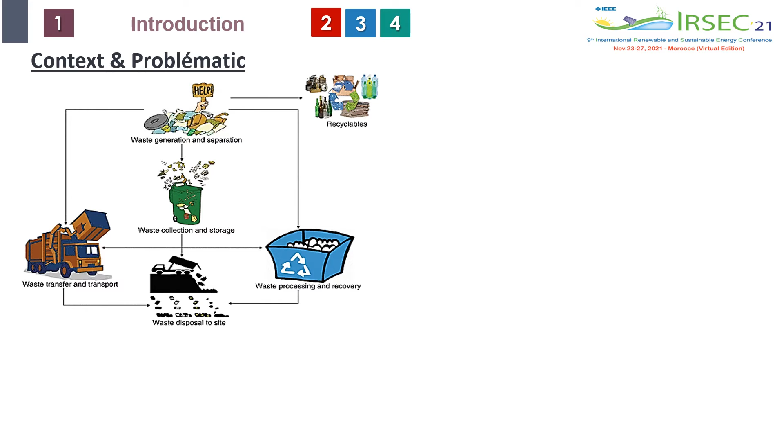As we know, municipal solid waste management is one of the major challenges facing the world. In Morocco and in Tunisia, the almost unique approach adopted for the disposal of municipal solid waste is as follows: collection and storage of waste, transfer and transportation to sorting and recycling centers, and then its disposal in landfill.

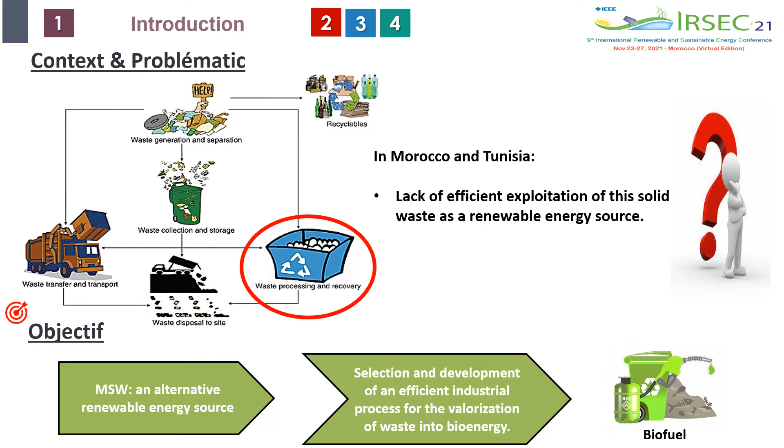Due to the lack of an efficient exploitation of the solid waste as a renewable energy resource, we are currently working on a research and development project within the framework of the Moroccan-Tunisian cooperation, where we seek to develop an efficient industrial process of valorization of MSW to produce bioenergy with an optimization of the energy consumption and the obtaining of a high output and without environmental impact.

In Morocco, according to 2019 statistics, the total production of household waste is 6.8 million tons, and it will increase significantly to 9.4 million tons by 2030. In Tunisia, the amount of MSW generated is 2.6 million tons per year. The estimated growth rate is 2.5% per year.

The composition of the waste is almost similar in both countries. It is characterized with a high moisture content, and it is constituted by a high quantity of biodegradable waste and a significant percentage of 20% of combustible solid waste with important calorific value like plastic, paper, cardboard that can be recycled and energetically recovered.

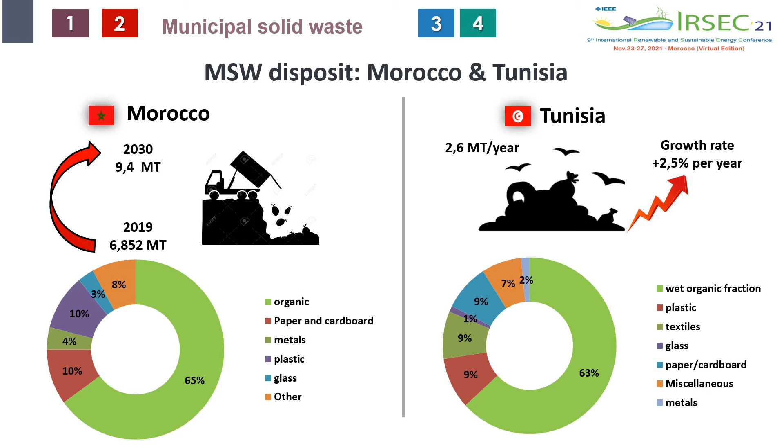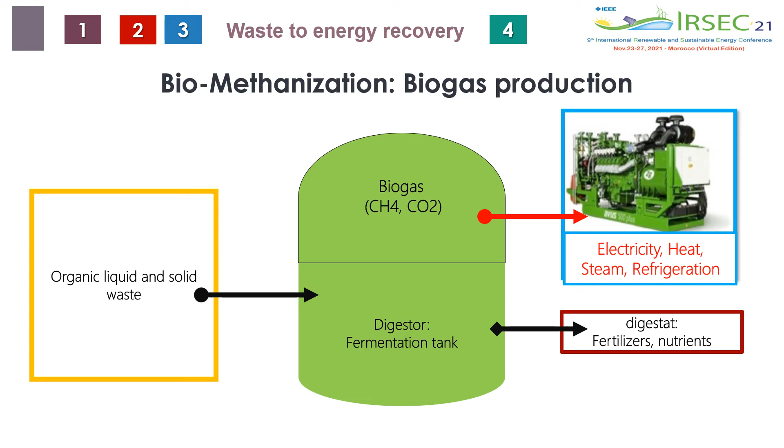In their strategy targeting energy recovery and waste reduction, Morocco and Tunisia have generally resorted to biochemical means such as bio-methanization due to the domination of fermentable waste. For example, in Tunisia, they have implemented a collection and treatment of biogas programs at the controlled landfills and some methanization units at certain agricultural complexes.

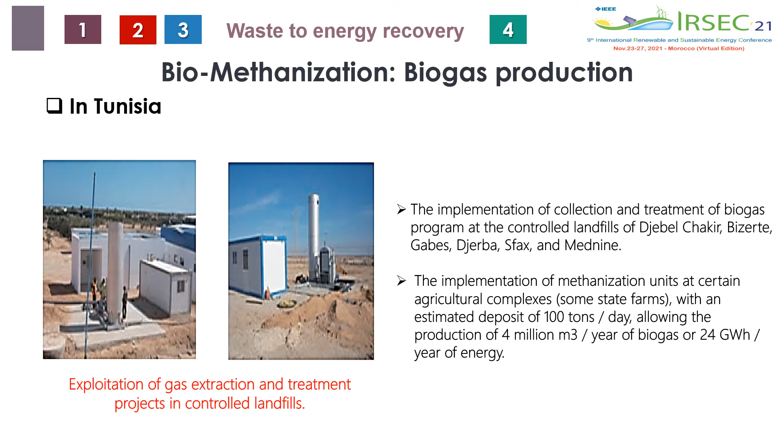In Morocco, several cities are involved in different energy projects for the biological recovery of MSW. For example, in Rabat, we have a large sorting center called Oum Azza, which recovers organic waste by producing biogas through a system of treatment and conditioning of biogas.

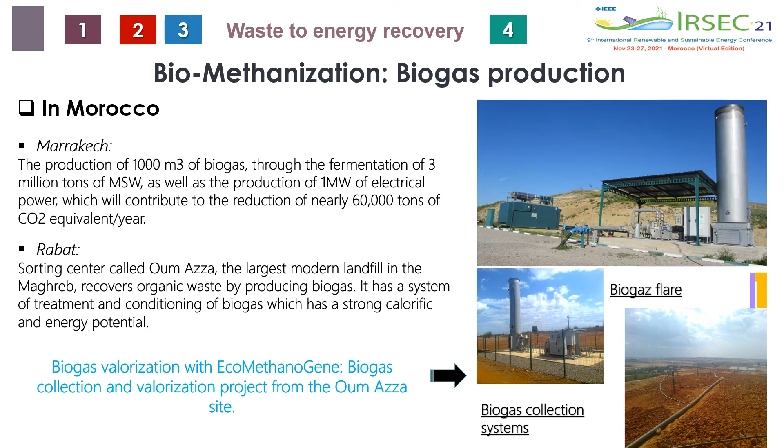Indeed, although the recovery of biogas from landfills is technically simple and economically cheaper and environmentally friendly, these gases are not produced in a continuous way because their generation takes long periods, as well as landfill gas collection systems cannot recover the full amount of methane.

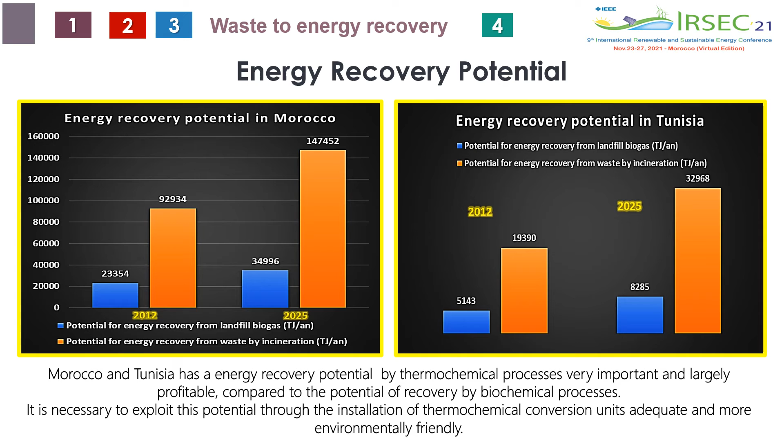Scarlat et al. estimated the potential of energy recovery from both incineration and landfill biogas processes in Morocco and in Tunisia. He found that Morocco and Tunisia have energy recovery potential by thermochemical processes very important and largely profitable compared to the recovery potential by biochemical processes. So it is necessary to exploit this potential through the installation of adequate and more ecological thermochemical conversion units.

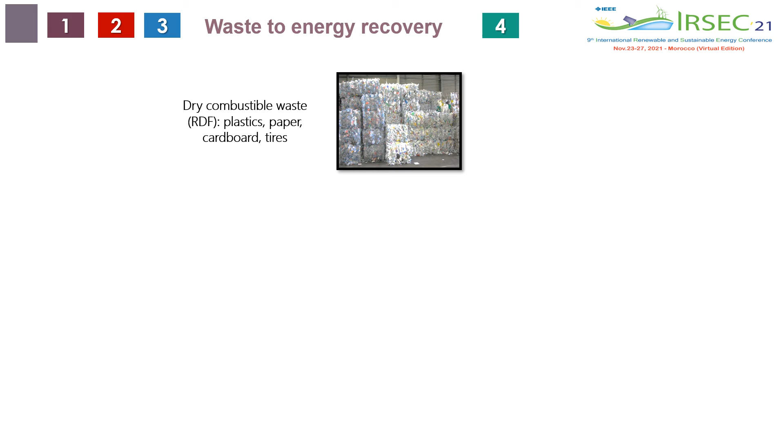Morocco and Tunisia are recently registered in projects of recovery of the non-fermentable fraction called refuse derived fuel through the mechanical biological treatment centers. This fraction is used as an alternative fuel to fossil fuel in the incinerators of cement plants. Nevertheless, incineration has a bad social ecological reputation because it generates gaseous effluent highly polluted with heavy metals as well as fly ash particles.

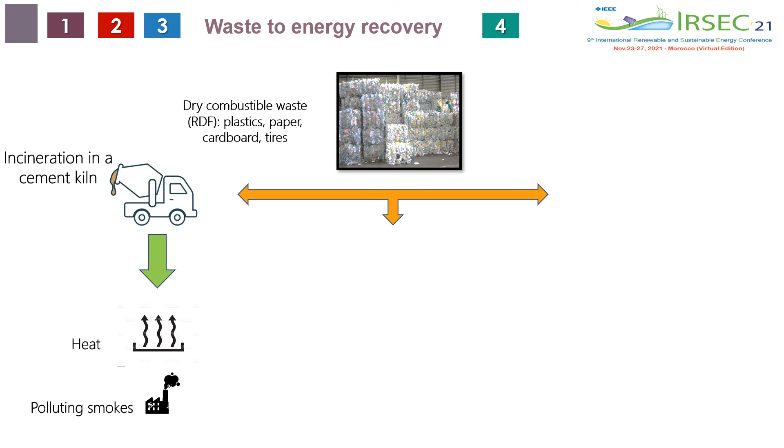However, after further processing, this dry waste can also be recovered into ecological products by pyrolysis or gasification process. Gasification is a complex process for the thermochemical degradation of solid matter at high temperature. It has good control of organic and inorganic pollutant emission. It favors the production of clean combustion gas, but it has a problem with equipment corrosion due to oxidation at high temperature and the presence of tar as a byproduct.

Pyrolysis is an endothermic process for solid matter thermochemical degradation at low temperature in absence of air. It favors the production of a good yield of bio-oil for transport and the production of biocarbon and syngas with a high calorific value. It is a more ecological process with low emission of pollutants. Furthermore, several scientific studies have shown that pyrolysis of mixed waste allows to increase the quantity and the quality of the bio-oil produced. So we can conclude that pyrolysis could be our appropriate choice.

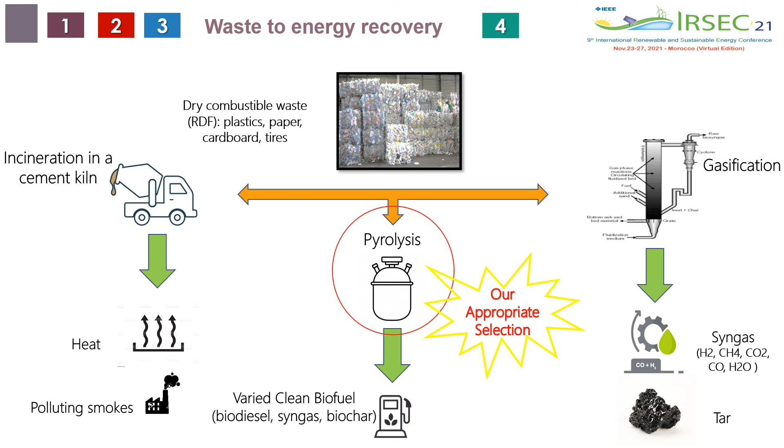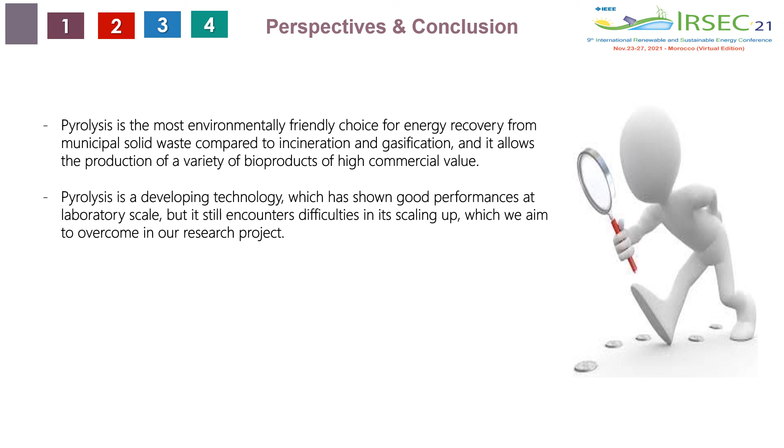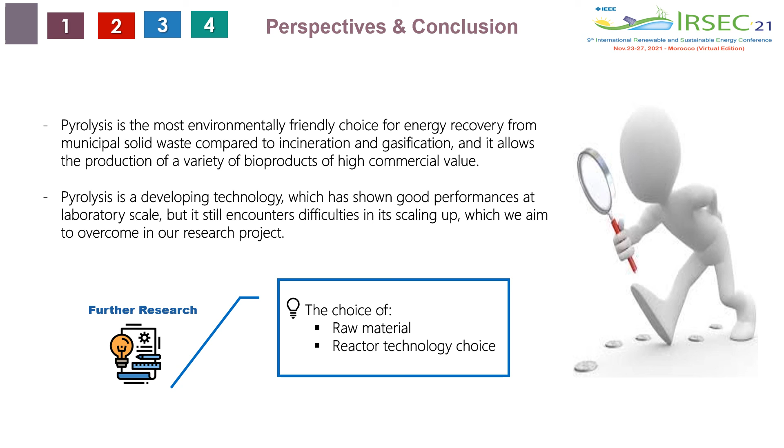In conclusion, pyrolysis is the most environmentally friendly choice for energy recovery for MSW. It is a developing technology which has shown good performance at laboratory scale, but it still encounters difficulties in its scaling up, which we aim to overcome in our research project. As further research, the choice of the raw material and the reactor technology is essential, aiming to reach a maximum performance of the pyrolysis process to produce a considerable quantity of bioenergy with a quality comparable to that of fossil fuel. That's all, and thank you for listening.